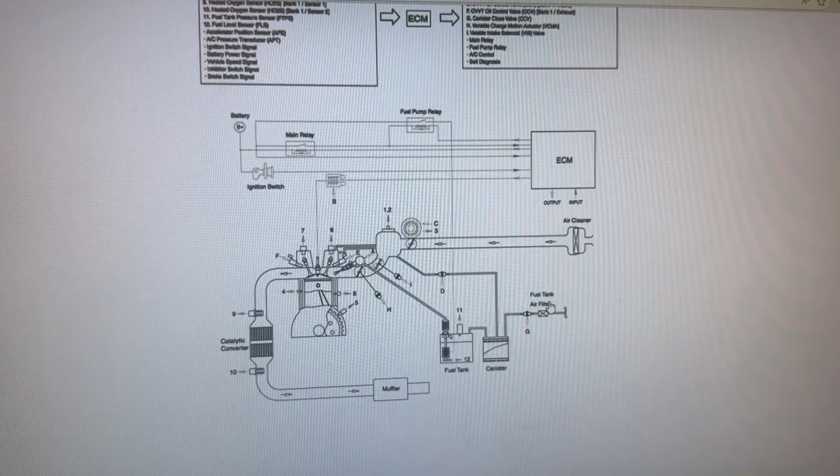Alright, today we are looking at a 2018 Hyundai Tucson. We're going to be looking at the Evap system. This vehicle has the typical closed Evap system with a charcoal canister and a purge control solenoid. Our charcoal canister is going to be right here, and then our purge solenoid is up here.

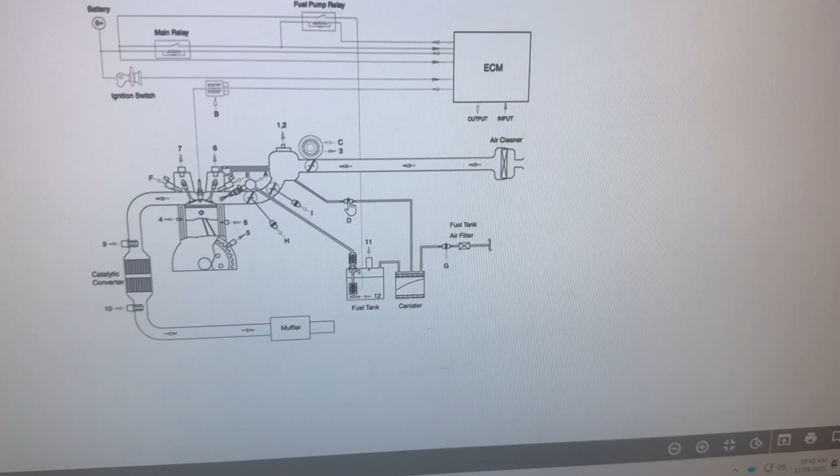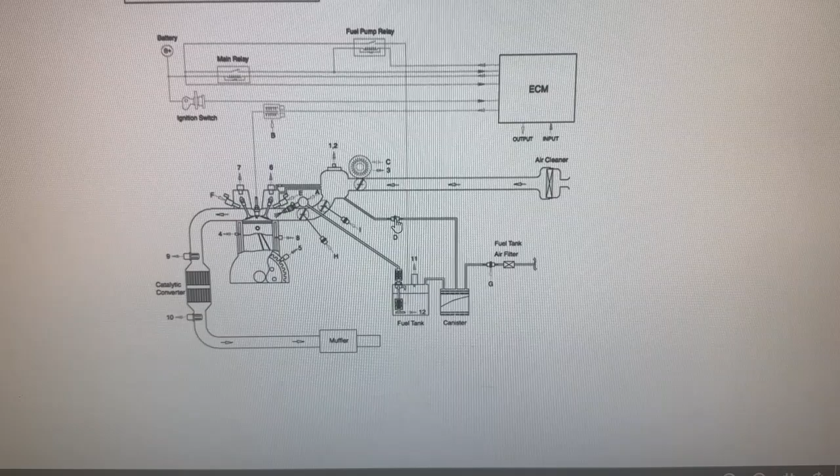Its job is to capture fuel vapors from the tank, store them, and then send them back to be burned in the engine. Our fuel tank is gonna send the hydrocarbons through our charcoal canister, and then our vent port is gonna open, allowing airflow through our fuel tank air filter, so no dirt can enter the evap system. As that is happening, our purge control solenoid will be duty cycled, creating a vacuum pull through our tank to our canister, then to our purge valve, then to our intake manifold, where our vapors will be burned.

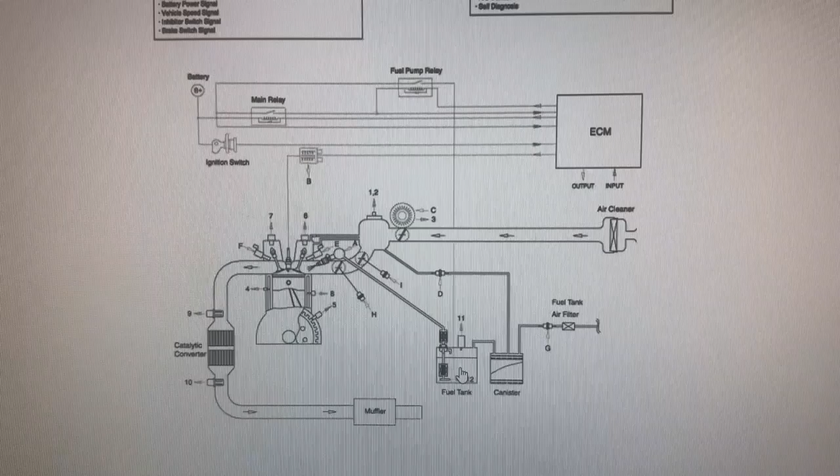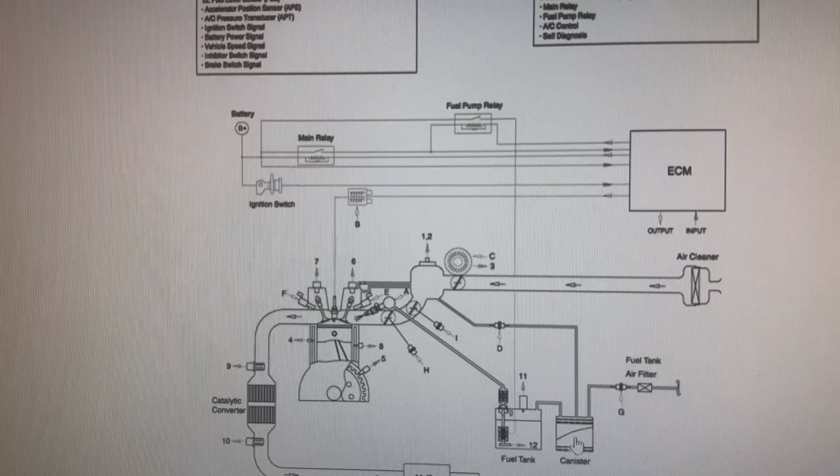So I'm gonna quickly show you the travel path. As this gathers in the fuel tank, the hydrocarbons go through here, through our canister, and then once we get our air through our fuel tank air filter, air comes in through here as our purge solenoid opens. The air and the hydrocarbons that basically got washed in the canister both pull a vacuum through our purge solenoid and then go right back into the intake manifold, where it'll be reburned and pass through the catalytic converter and the muffler.

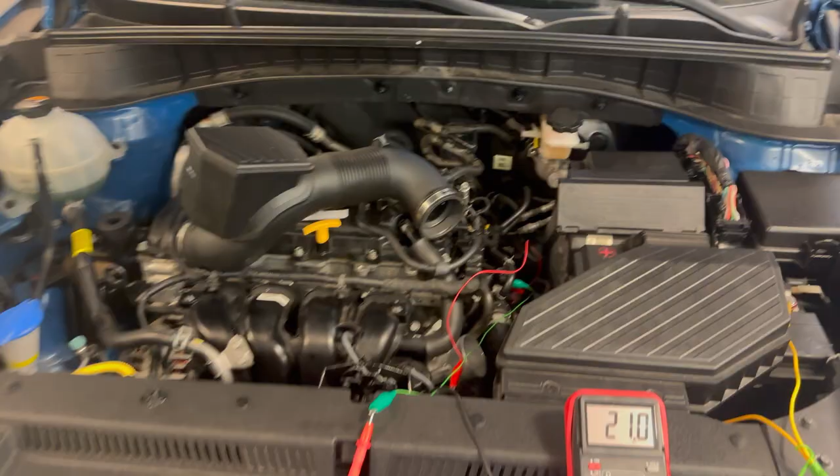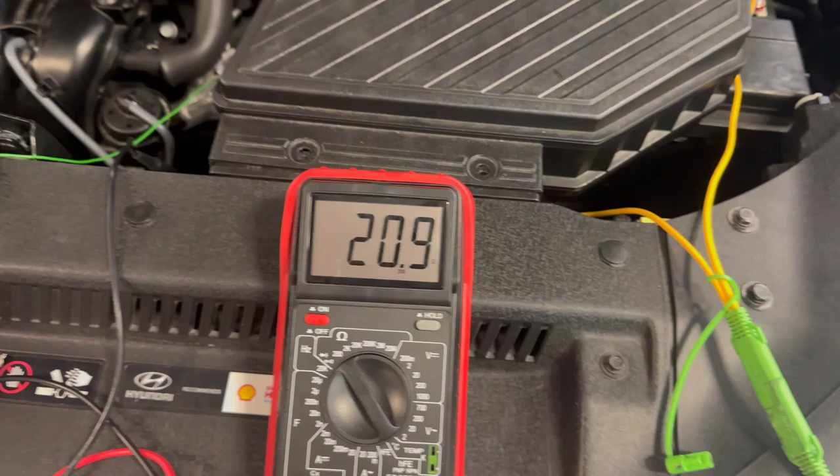Alright, we're still working on the Tucson. Right now I am looking at the purge control solenoid, right here. I am currently ohming it out just to see if I can get the resistance measurement. It is 20.9 ohms, which is within the spec of the purge control solenoid.

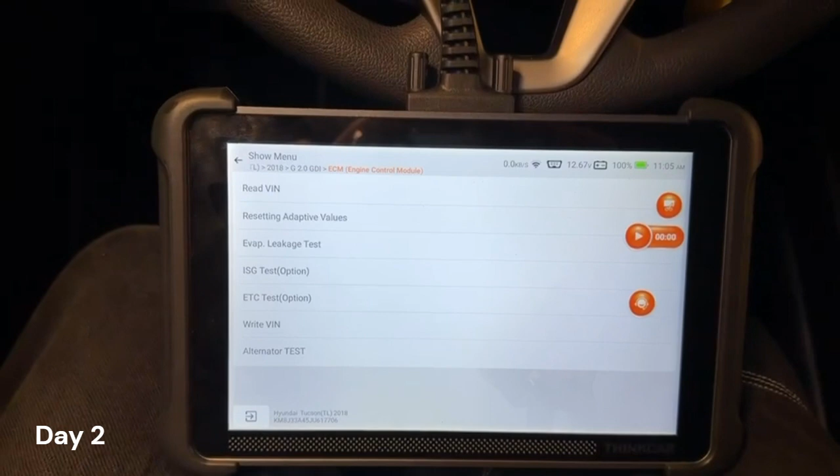Alright, so now we're looking at this 2018 Hyundai Tucson, and we have our ThinkCar scan tool hooked up, and we found out that we can actually remotely do an evap leakage test on this scan tool. So our car is getting up to temp right now, and once it gets up to temp, we're going to start the test. We have no codes on the dash currently, no lights on the dash.

There are a couple of prerequisites you need to follow before this test actually ends up completing or being able to start. You need to have basically no DTCs with anything related to the ECT or O2 sensors and stuff like that. You need to have more than 11 volts of battery voltage and over 176 degrees Fahrenheit for your coolant temp.

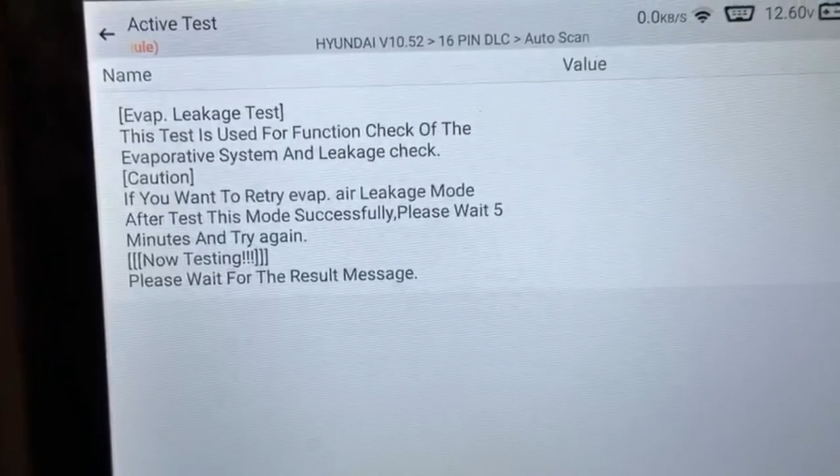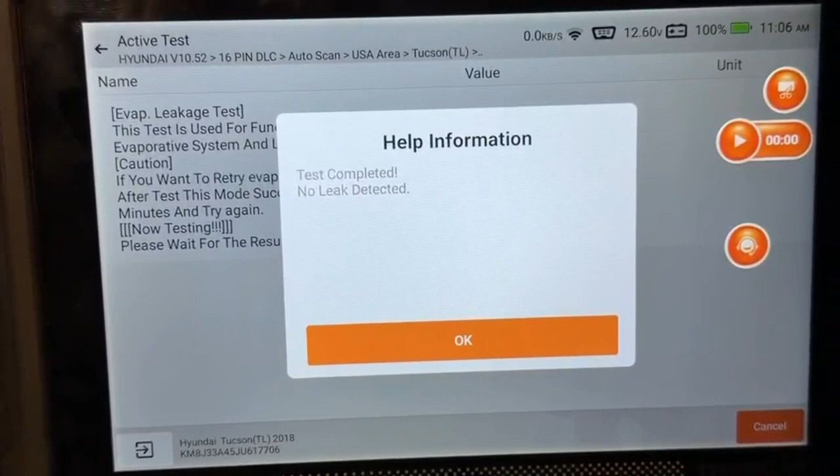Alright, so right now we are testing the evap leakage, and we're going to go ahead and zoom in a little bit. It's testing currently. There's no leaks detected. Okay, so that's how we know our evap system is working, and that's good.